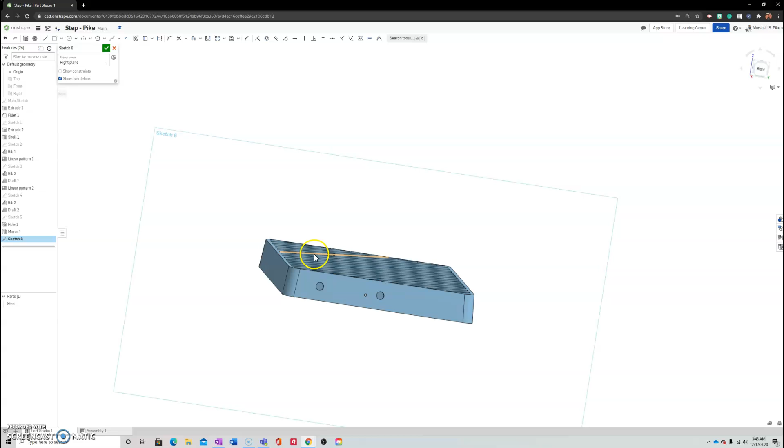So then I'm going to hit N to view normal to sketch plane. And I'm going to zoom in here a little bit. What I like to do here, to be honest, is over here on the view cube, if you go down and you hit hidden edges visible, it'll get rid of the color portion. You can really see what you've been working with from this part.

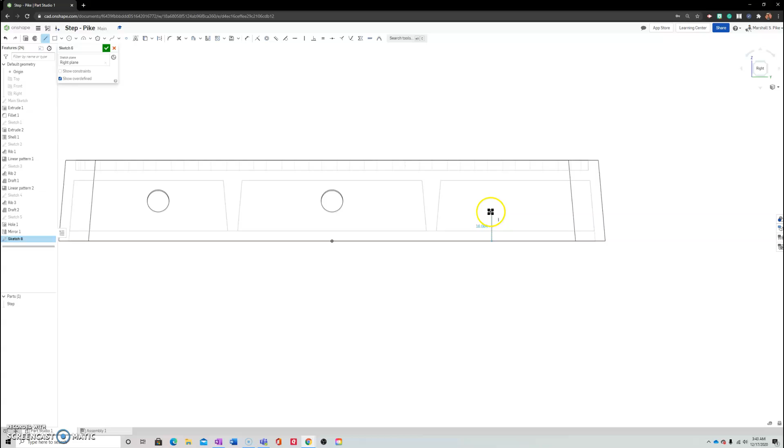So from here I want to go ahead and sketch my little arched doorway. So from the line, from the bottom horizontal, I'm going to just draw my line. I have two lines here and I'm going to snap them vertical and horizontal. Then A for arc, which is a 3-point arc. So I need a starting point, ending point, and then I need a radius, and I want to bring it up to tangent.

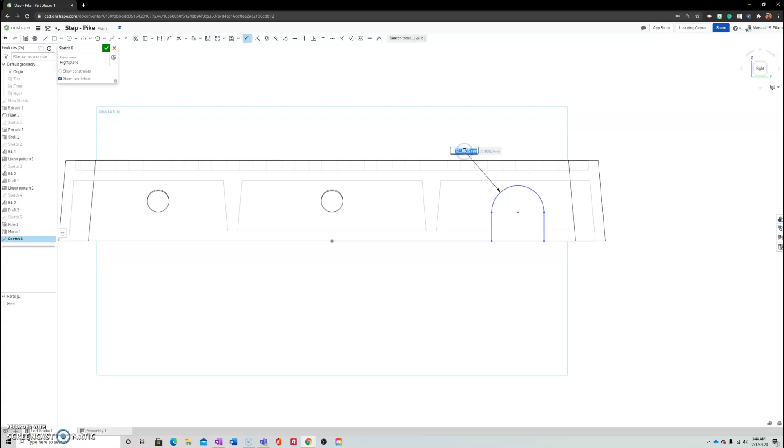And now that I have my geometric line, I can go ahead and add my dimensions. So D for dimensions. I want the radius to be 12. I want the center point from the end of the step to be 50, and then I want the height to be 15. And now that I have it, I'm almost done.

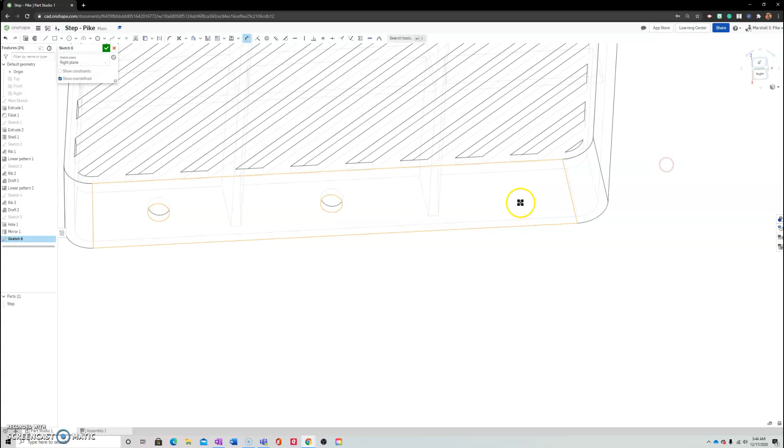There's one final step that if you don't do, you will not be able to extrude it, and that is the use with sketch command, because we're drawing this on the right work plane, which is really in the center. So as I rotate, you see how it's gone here. It's because it's actually still in the center, and I need to project this bottom line to it.

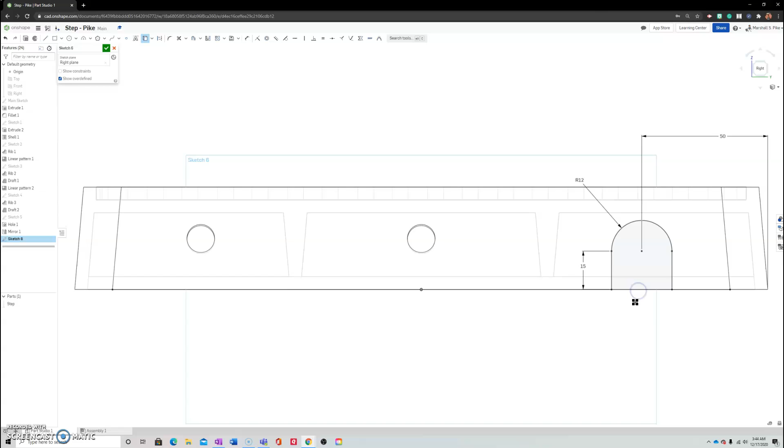So up here in our drawing window on the quick access toolbar, I have this little thing use, which just projects that geometry. So if you turn it on, you want to select this bottom line, and now see how it shaded inside that drawing, letting me know that I now have two different components, and I'm ready to move on here. So now I can accept sketch 6 and I'm ready to extrude it.

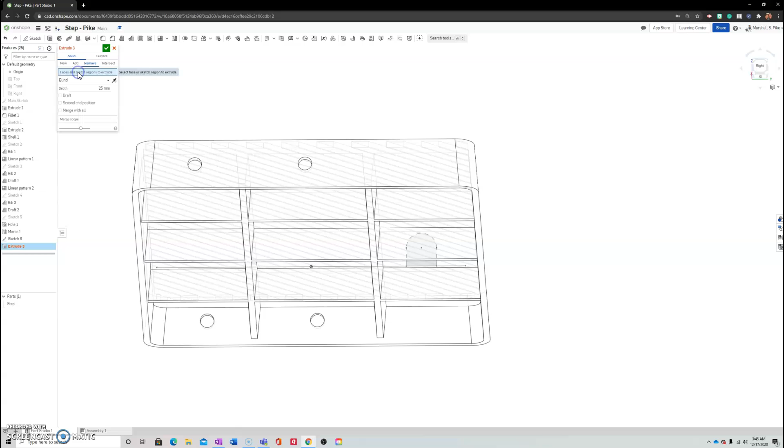So it's sitting right here in the center, and I can select extrude. When I extrude, I'm actually removing material. The faces that I want to extrude are what I just drew here, which is sketch 6, and instead of blind, I want it to be through all, and it's going in one direction at this point, so it's going through all of the components here.

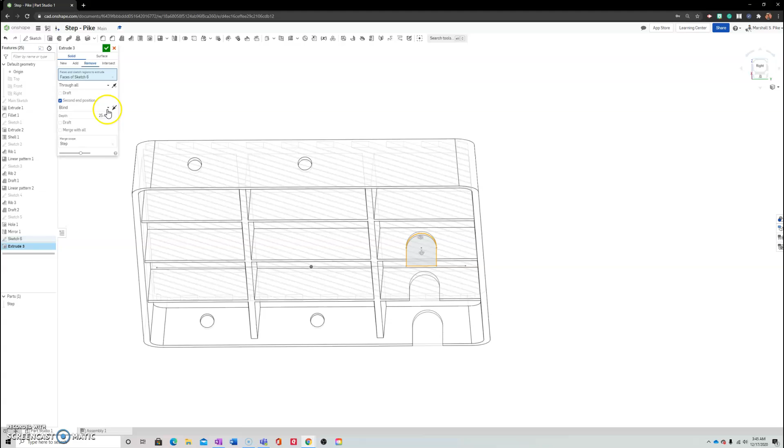So I need to add a second end position, which will be in the opposite direction, and instead of blind, it is through all as well. And now it's cutting my component all the way through. So I can go ahead and accept it now, and my part is done. If you would like, you can come back over to this little view cube area and go back to shaded, and now you can see our step.

We have a couple more things we want to do here. We want to assign a material. So I'm going to come to the feature tree, right click, assign material, and this step is made from nylon. And now I should be ready to check my component properties. And I think this is done in kilograms. So let's go ahead and turn it on.

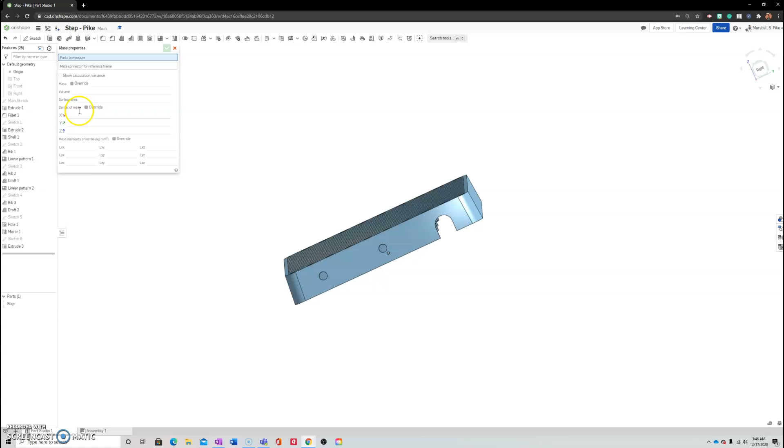It's looking for what I want to prop it on, and I have this set up as kilograms. And actually, this is one of the few times, sometimes when you draw it, folks, it's perfectly drawn, because the quiz question is 1.493 kilograms.

All right, folks, congratulations. We have now completed the part design using Part Studio. Your certification should be complete.